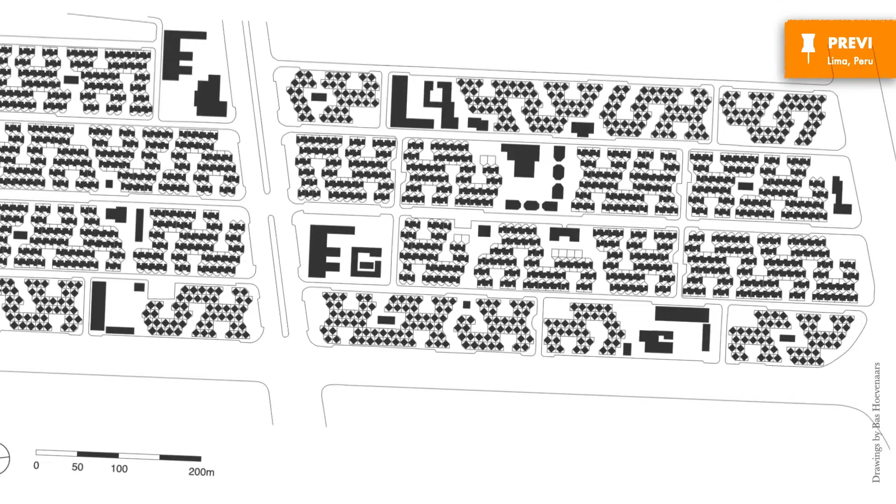The projects developed by all these famous architects included a strategy to accommodate growth and change. See, for example, the case of the project developed by Aldo van Eyck. After occupation by residents, each family took the job of expanding their homes in their own way and as and when they deemed fit.

Almost 50 years after the project was first implemented, these houses look very different. In fact, it is these differences that illustrate how incremental housing strategies are important to enable people's initiatives in shaping their homes and to make them a living organism that adapts to the dynamic nature of life in cities such as Lima.

As Correa had stated at that time, without malleability, you cannot have cultural expression. All you can get is a top-down notion of how people should live.

But incremental housing strategies were not only developed in the developing countries such as Peru or India. At the same time that the Previ experiment was being developed, another remarkable case of incremental housing was being built on the other side of the world.

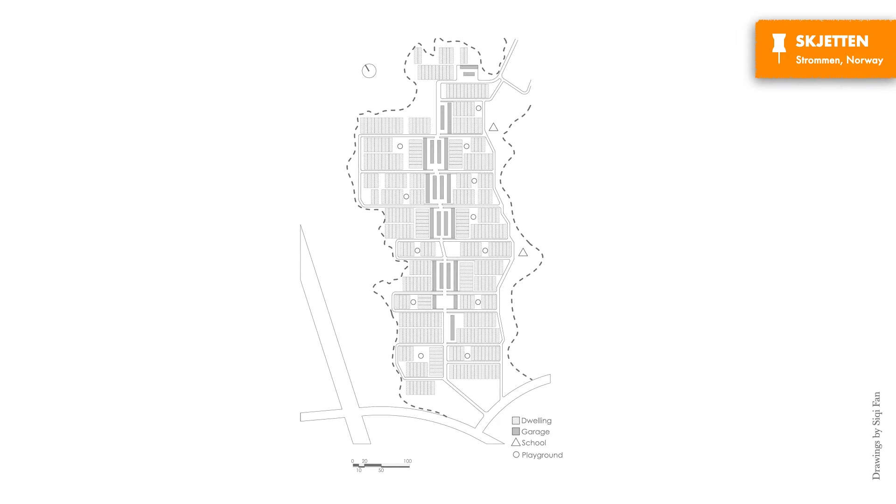This is the case of Skjetten Town, a new settlement projected for almost 2,000 households to be located on an area located in the vicinity of Strommen, approximately 20 kilometers from Oslo. The architect Niels Ole Lund was the coordinator of the team that won the competition for a new low-rise high-density district launched in 1965 by the municipality.

While there were some multi-story blocks, including in the plan, the majority of households were accommodated in the expandable two-story, 6.4-meter wide row houses. The project of the row houses was based on a modular system, with a fixed core and multiple possibilities for expansion.

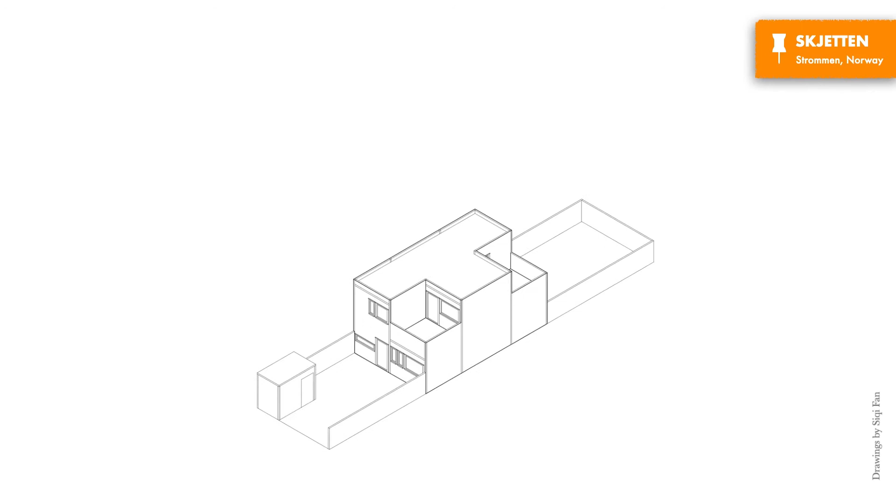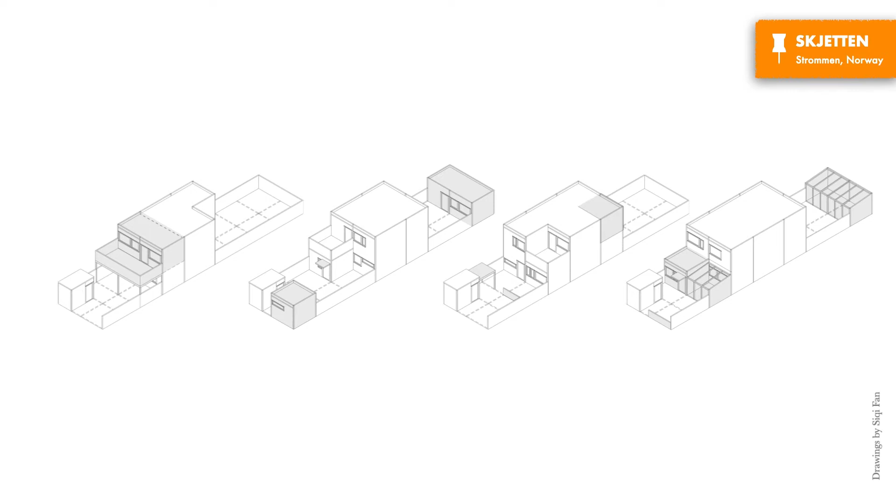These expansions, however, should be framed within the structural grid, using industrialized, factory-produced components to be assembled on site. To stress further the openness of the project, the designers created a house manual meant to support the residents' self-initiated expansions, demonstrating the possibilities of the system as well as the technical and economic implications.

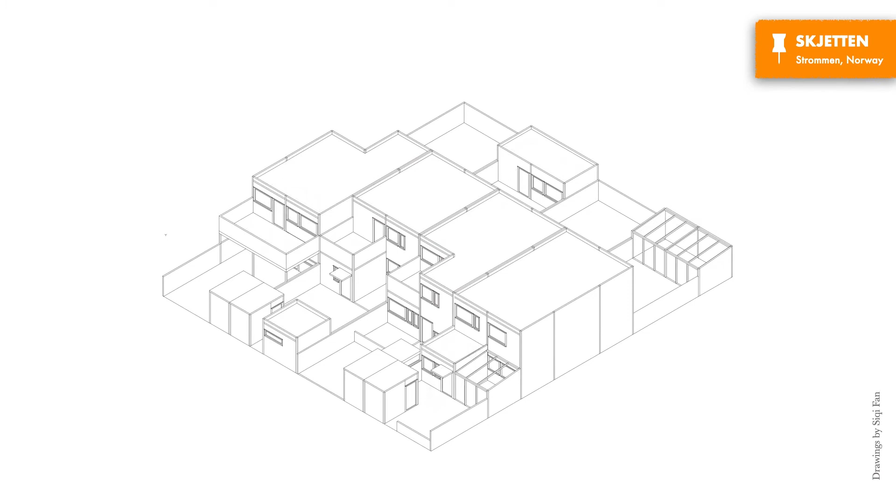The motto of Lund's team-winning proposal was variation, order, community, privacy. This motto demonstrates the team's attempt to negotiate binary polarities, combining order with possibilities for individual expression and securing the privacy of each household while promoting a sense of community.

The two examples of incremental housing discussed earlier are very specific and connected with a certain context. In the 1970s and 80s, however, incremental housing strategies were also implemented in the form of mass housing projects in the developing world. The Sites and Services approach, sponsored by the World Bank, is arguably the best example of this trend.

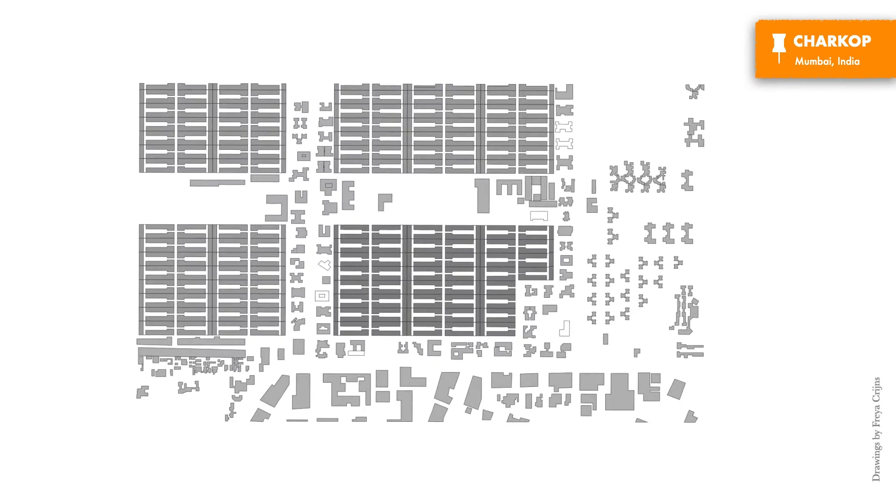During that period, there were more than 3 million houses built according to this model. A good example of this strategy is the Charkop Sites and Services scheme developed in Mumbai in the mid-1980s. The key features of this project are the design of the typical residential cluster and a clear hierarchical street grid and open space network. Each typical cluster included 35 plots, varying from 25 to 40 square meters.

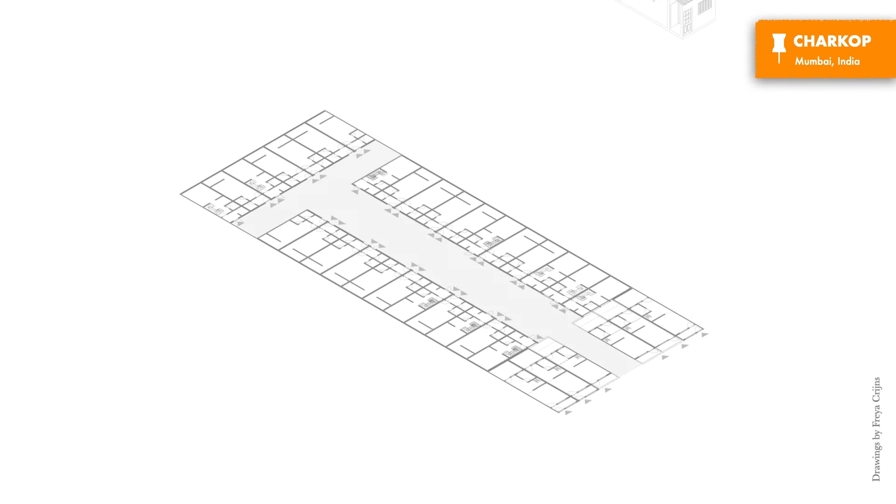Despite the relatively small size of the plot, over time, each household could expand the house vertically, growing the habitable area incrementally with self-initiated expansions. Over the last 30 years, the projected incremental growth has happened as planned.

Equally important is that the social, economic, and environmental qualities of the neighborhood were not undermined by this incremental growth. In fact, the opposite is true. Charkop has now become a sought-after middle-income neighborhood with high levels of livability.

However, by the early 1990s, not just in India but around the world, the World Bank and other governmental agencies had moved away from developing sites and services projects, focusing their attention instead to enabling greater private sector participation in housing.

A project that, in a sense, is an outlier to this trend can be found in Chile. In fact, this renewed interest in incremental housing can largely be credited to the visibility of the Quinta Monroy project, developed between 2003 and 2006 by the Chilean architectural office Elemental, headed by the Pritzker Prize-winning architect Alejandro Aravena for Iquique, a coastal city in north of Chile.

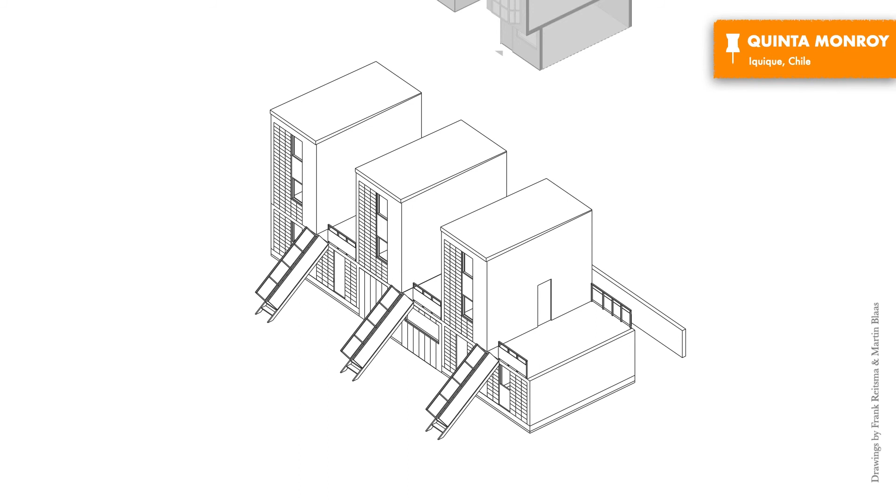In Quinta Monroy, Aravena and his colleagues developed an incremental housing approach based on the concept of the half house. In other words, the strategy was based on an allocation of the available resources to build a good quality initial core, which is roughly half of the house, and to let the residents build the other half by themselves.